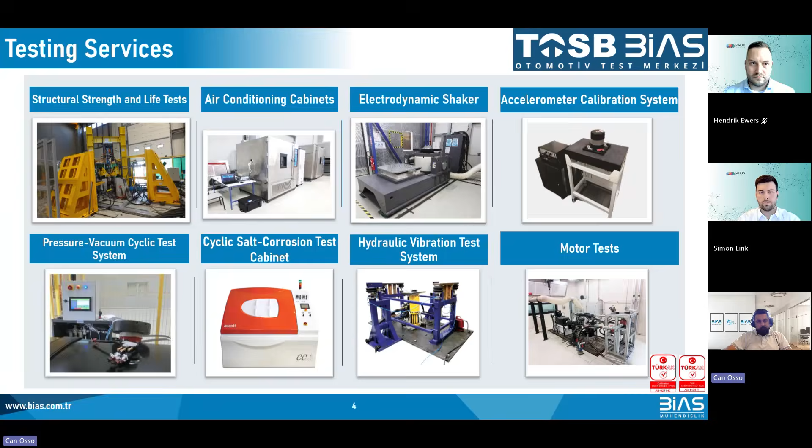We are representing several test, measurement, and CAE companies which are the best in their field, and one of them is IANUS Simulation. As you can see in the presentation, our softwares are the most powerful ones in FEA, CFD, MBD, and acoustic, which are Nastran, Cradle, Adams, Actran, Romax, and IANUS as well.

We also have co-simulation capabilities with different disciplines such as fluid structure interaction and aeroacoustics. We have the capability to manage all software-related processes, including training, technical support, engineering services, pre-sales and post-sales activities.

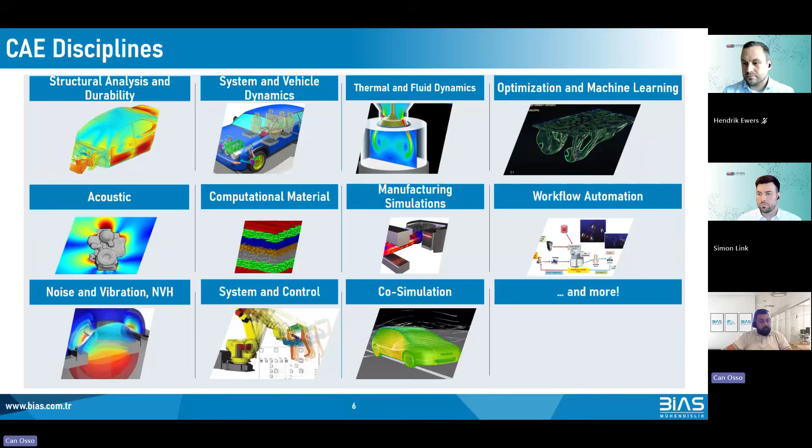We can also provide engineering services, and you can see our expertise in engineering services for different disciplines, from NVH analysis to multi-body dynamics analysis, from analysis of composite structures to aerodynamic analysis of aircrafts. We have a large team of experts in their respective fields.

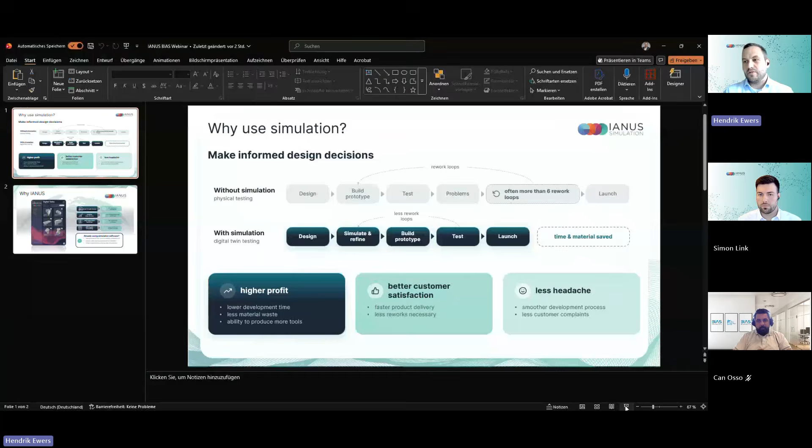So the first question I brought with us today is, why should you simulate? What's the reason, why should you do it? I mean, you are experts in your fields, maybe you work with experience for many years, but why should you now switch and start implementing simulations? The best reason for it is that you are able to make informed design decisions.

In the past, without simulation, you built the design, you built the prototype, you tested it, you experienced some problems in the prototype. Maybe the velocity or the viscosity of the extrusion is not right, for example. Then you have to do rework loops, build a new prototype, test it again, and you face another type of problems. So you have to do all these loops: rework, design, test it, rework, design, test it. And that costs a lot of money and a lot of time before you are able to launch your product.

With simulation, you switch to digital twin testing. So instead of testing your physical tools, you develop your physical prototypes but test on digital twins, which is much faster and much cheaper. Why is that? Because first you create the design, you simulate, make a little adjustment on the design, build the prototype, test again, and you have less rework loops. Because in simulations, you see directly where something is not correct with your tool design, where you should do improvement.

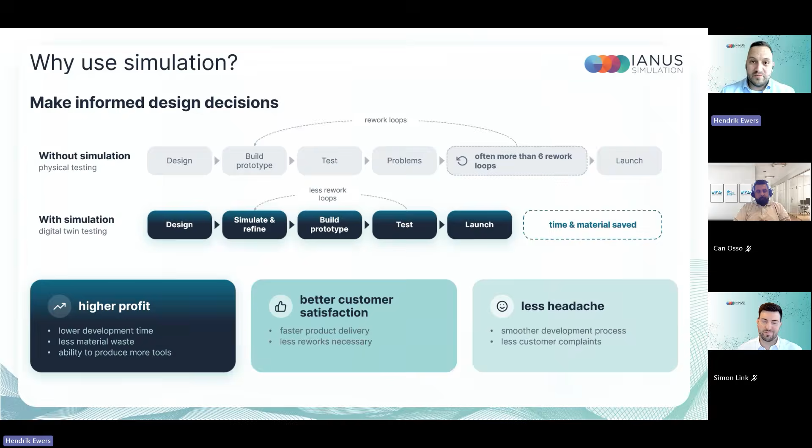And that means you have a higher profit because you have a lower development time, you have less material waste, and you are able to produce more tools, so you are able to sell more. You have better customer satisfaction because the faster product delivery and less rework necessary create a happier customer. And of course, you have less headache because you don't have these customer complaints like maybe you used to, and the development process is much smoother.

If you choose to simulate, which is the modern way of creating new tools, why should you use IANUS simulation software? First of all, we are cloud and web-based. That means you don't need any expensive hardware. You don't need to install anything. You don't need to update anything. We do that for you. We are cloud-based. You simply log in like you used to log in into Instagram, Facebook, or LinkedIn.

Our software, and you will see that in the live demo in a minute, is very intuitive and easy to use. So you don't need to be a simulation expert. It doesn't matter if you have simulated already or not. It's very easy to use. You don't need the knowledge. There's no complicated user interface. You can literally start right from the spot.

Why is it so easy to use? Because we use fully automated workflows. That means everything is automated. You can start a simulation within 5 minutes. You don't need any extensive trainings. And because we calculate in the cloud on high performance clusters in Germany, we receive very fast and reliable results, because those high performance clusters are among the fastest in Europe.

And now maybe some of you are already using simulation software and say, hey, I'm using this, I'm using that. That's totally fine, don't switch from it. You can use us in addition to your current solution. You can take pressure from your simulation department. You can enable your salespeople who are maybe not so familiar with the technical simulation thing to simulate and create better offers. Or you can also do faster experiments when you use parallel simulations. That's the final part of this presentation.

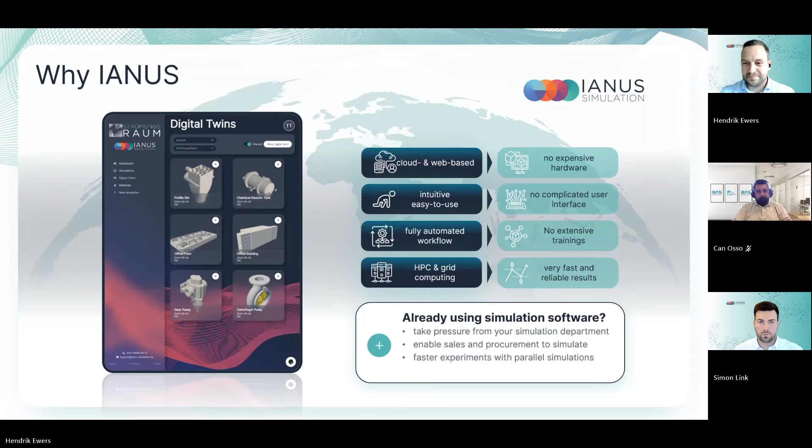And today I will go into the technical details, give you an overview of the simulation for plastic injection molding and plastic profile extrusion.

So again, very shortly, why do we use simulation? Hendrik already gave an overview of the benefits. And yes, we use them to make better decisions. So what does this mean? For example, we can use simulation to create more accurate quotations by providing reliable estimates of cycle times, and thereby also evaluate the manufacturability of the parts before it goes into production. And we can also use it to predict and optimize the manufacturing process.

This is something we see in real applications with our customers, that we can reduce the development time and also the cost of tools. And yes, we can also reduce the amount of material needed for the testing.

So yes, I will share my screen now. Give me a second.

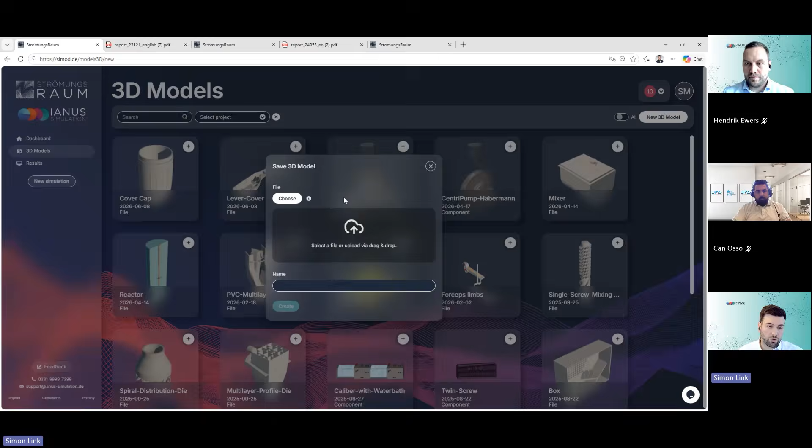So when we've created the flow channel from the extrusion die, we go to a new 3D model, go to the file browser. We can then select the file, and we support different formats like exchange formats like STEP, or native formats like SolidWorks, Inventor, NX, and Parasolid. You simply enter a name, click create, and then the model is being uploaded.

So then we go to this flow channel. We say, okay, we want to start a new simulation here. And what happens next is that we have to decide what we want to do. We want to do the extrusion die simulation. And we have to enter the inflow temperature first, let's say 220 degrees Celsius.

We select the material base, and we have a very huge material database, and I will select this ABS here for now. Inside there's also the processing temperature, in this case, which we can change if we want to run at 80 degrees also. Then we have to define the throughput, like 150 kilograms per hour.

And the model I selected is a co-extrusion with two different materials, so we need to define the second inflow, as you can see here. We select a different material for this example, define the throughput here also, and then we confirm this with next.

And what you can see here is a summary, an overview of all the configuration we've made. So we see the inflow temperature, the material information, and so on. And when everything is correct, we can start the simulation here on the top right.

And what's basically happening next is that the simulation is then submitted to one of the HPC clusters, the high performance computing clusters, where we have computational capacities. And then everything is done completely automatically.

So we start with the pre-processing, meaning the geometry preparation, the meshing itself, the simulation, so the solving of the simulation, and also the post-processing, where we also generate the simulation report completely automatically.

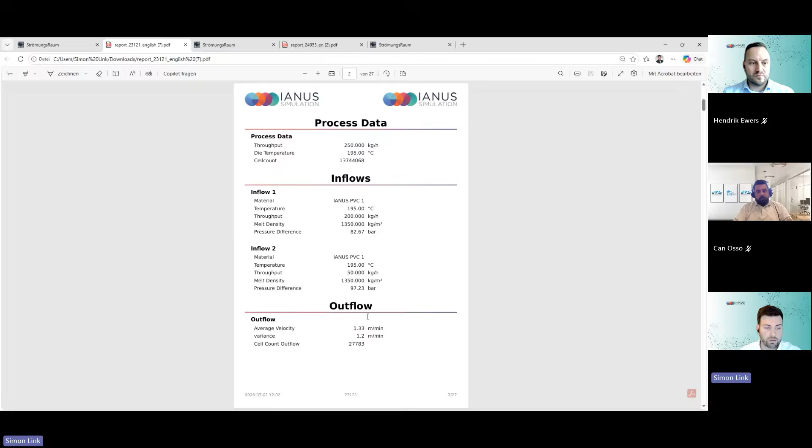And also what's simulated: what is the average velocity looking like, which is very important at the exit of the die, and also the variance. So we basically want to aim for a more or less uniform velocity distribution at the exit of the die. The variance should be as small as possible.

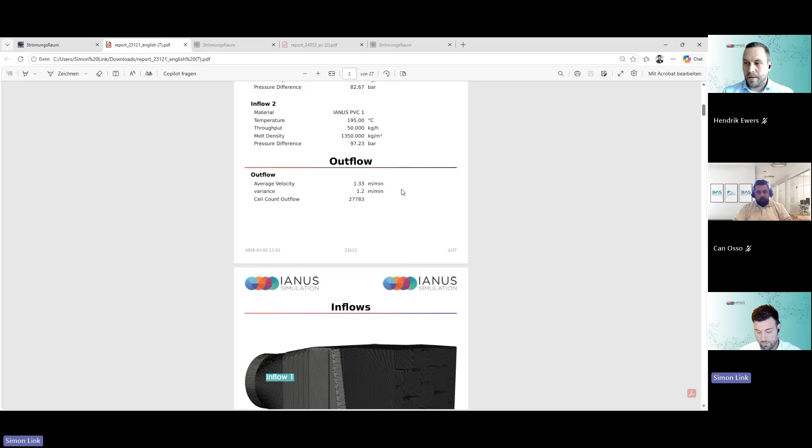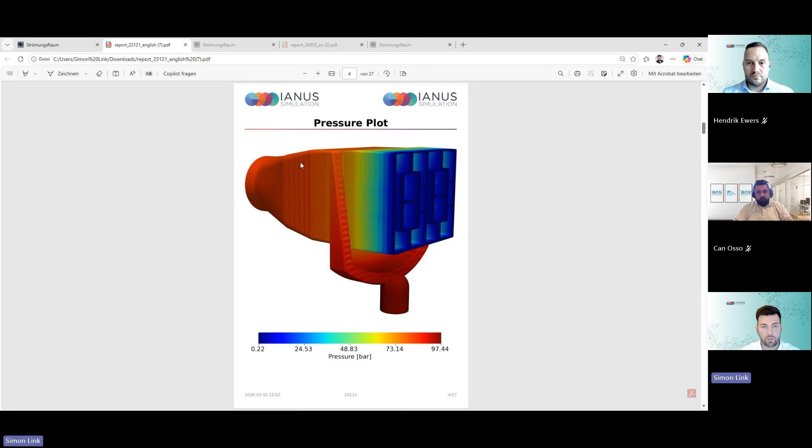We'll give you a very quick overview of the different measurements we have. So here's the pressure plot, where we can see the different pressures inside the die, of the melt itself, and we can detect areas which have higher or smaller pressure. So we can see what's going on in the extrusion die. We get more insights, and we can then make improvements to our die.

The most important plot is the one for the velocities, as you can see at the exit of the die. The scale shows the velocity: blue is almost 0 meters per minute, red is around 7 meters per minute. We see very low velocities in the middle of the profile, much higher velocities on the outside, and also very small velocities at the top. So we see these velocity hotspots, as I call them, and this can be a problem in the manufacturing process if we don't have a more or less uniform velocity.

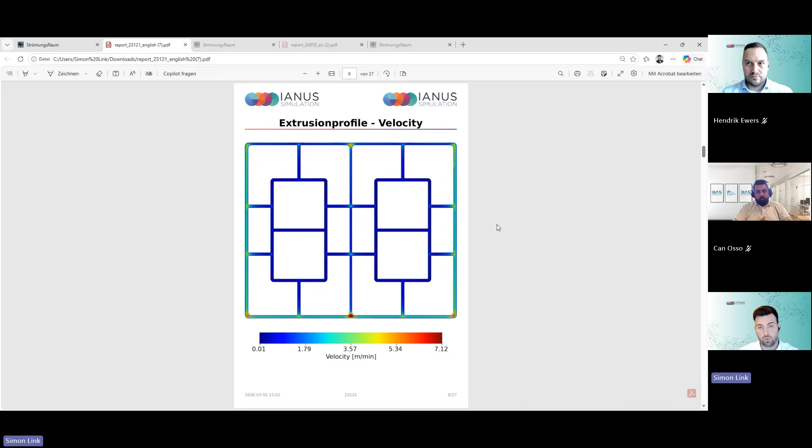So we can go back into our tool design and make adaptations. We can detect areas, and maybe in the middle we can decrease the resistance of the flow, and on the outside we can also make adaptations to reach a more uniform material velocity.

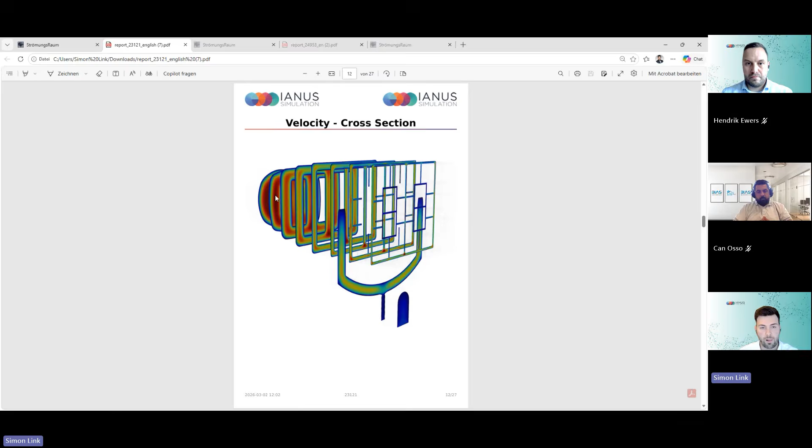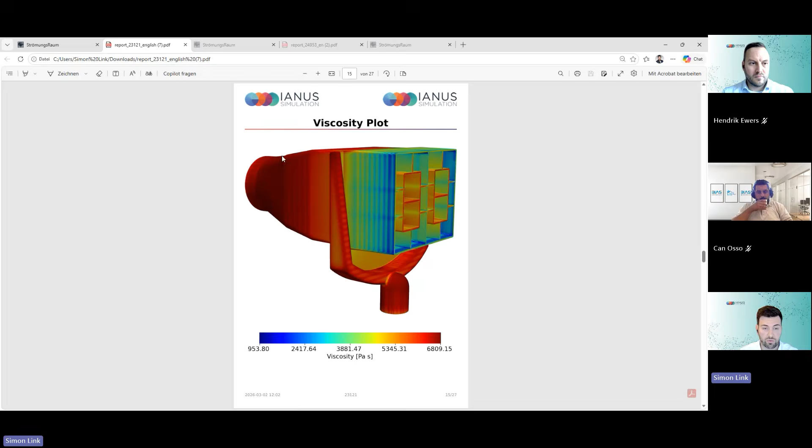We also have many other measurements, I'll go through them quickly. As you can see, we have these plots with different cross sections and slices, where you can go into detail and see what's happening inside each one. We also have this for viscosities, so you can detect dead zones in areas with very high viscosity, and the same view for shear rate.

What's also very important is the streamline plot, so we can see which paths the melt will take, beginning from the two different inflows, and then calculate the residence time. This lets us detect areas that may lead to very high residence times for the melt as it moves through, and we can aim for changes and improvements in the tool design.

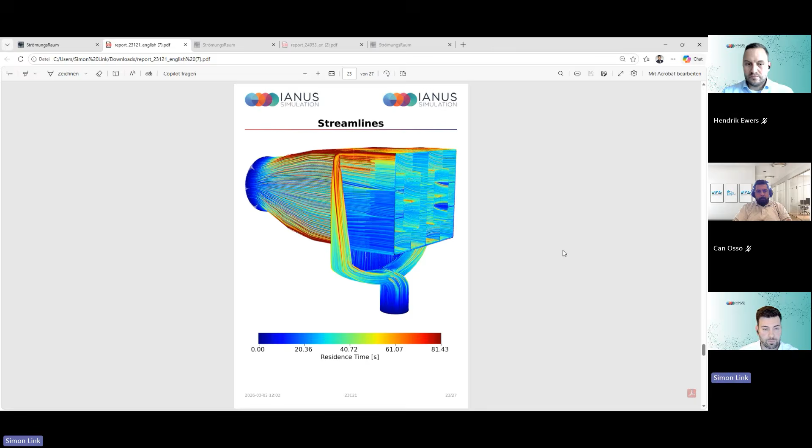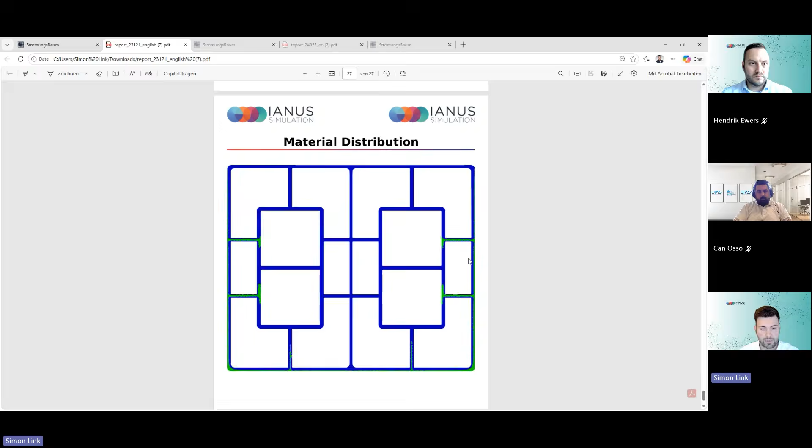What's also very interesting is the material distribution, as you can see here. This is a co-extrusion profile with two different materials. On the inside we have the blue old material, and on the outside there's the new virgin material in green. We can detect the layer thickness and see whether we have a continuous layer or not.

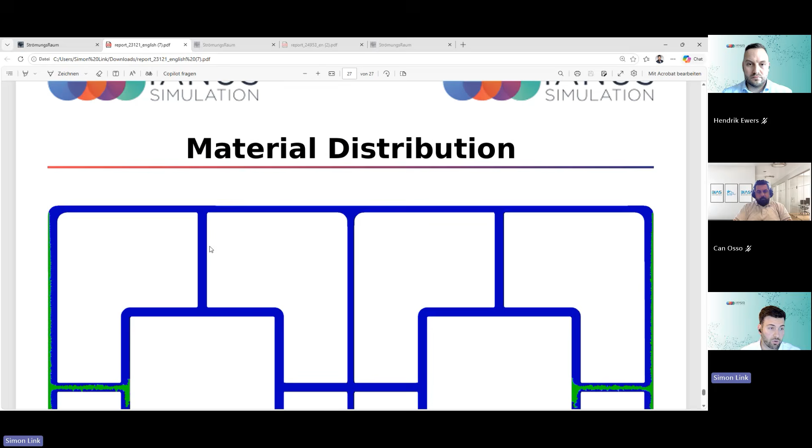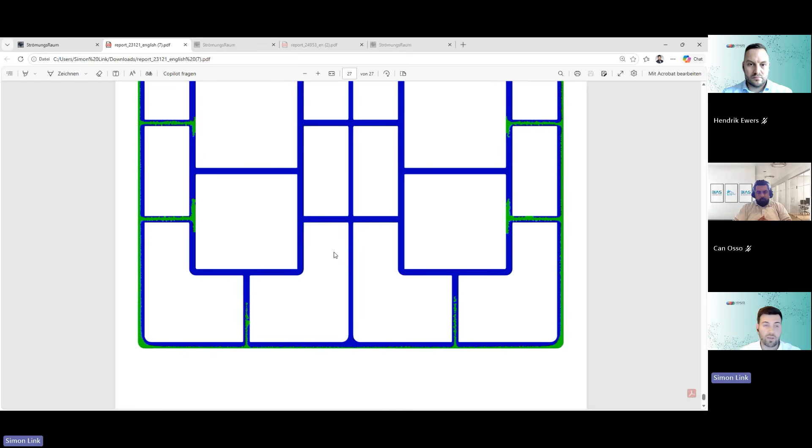As you can see here on the top, the profile is not covered by the green material at all, and we can also see the green material moving into the profile. This makes it easier for us to make improvements to the tool even before manufacturing.

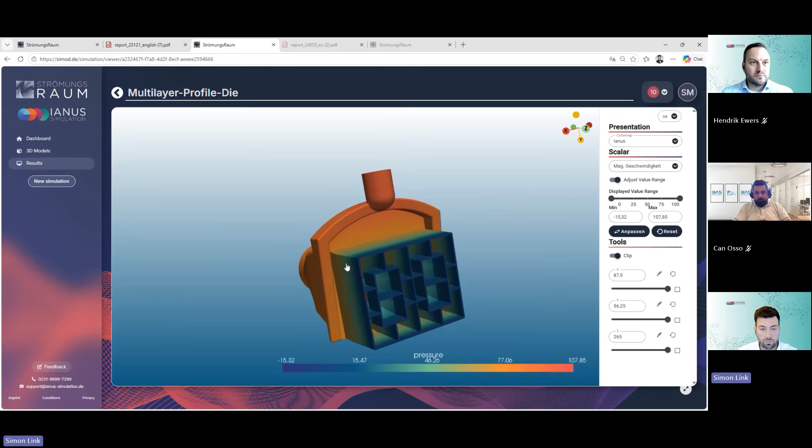If we want even more insights, we also have this live viewer, where we can have a more detailed look. If I switch to the velocities - this can take a second to load - now it's loaded, and we can adapt the scalar range of the velocity scale, and also make section cuts.

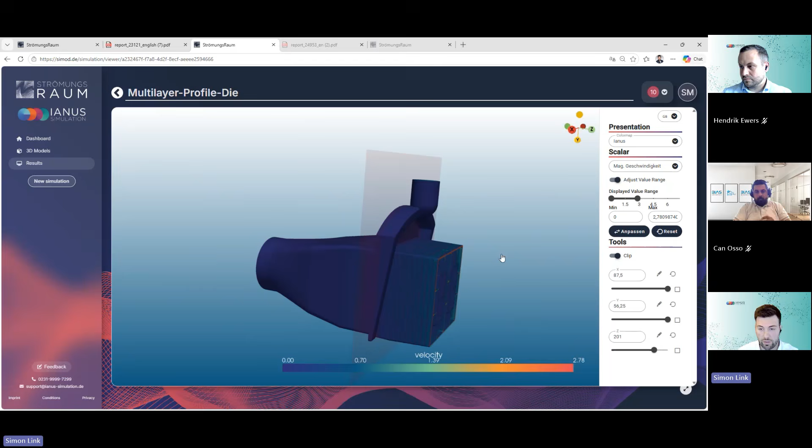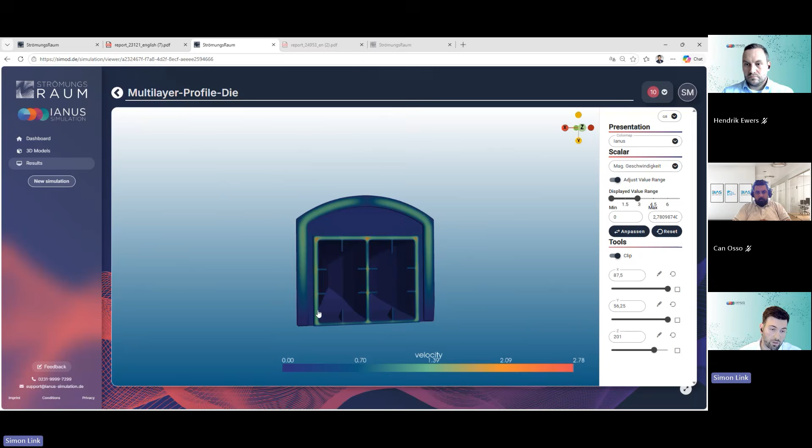I can have a look at the front, but when I want more insight into what's happening inside my tool, I can use the section cut. I'll cut it and see what's happening - this takes a second. Now we see what's happening in the area where the melt from the two inflows meets, and there are quite some areas where the melt velocity is lower. This will probably lead to less material in the second layer on the outside, and we use this information to adapt the tool design.

Okay, so that's it for the profile extrusion, but I would also like to give you more insight into injection molding and what we're capable of doing there.

It's basically the same when we want to upload the model. We go to new 3D model and upload the part for injection molding, as you can see here. Then we click on new simulation, and we have to select more parameters - in this case we also say we want to do injection molding.

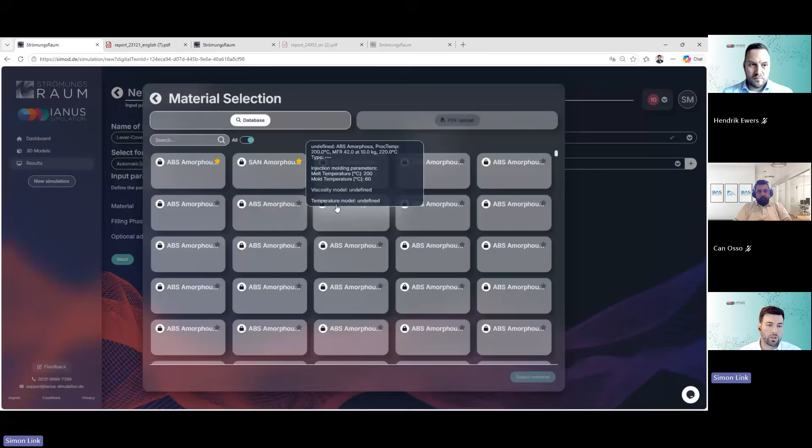We have to select the material for the injection molding - I'll go with this one. As you can see, different values for the mold temperature and melt temperature are pre-selected. We do this to give the user a first idea of what temperatures are reasonable for the mold temperature and melt temperature, but you're also free to change this.

So we can change the temperature here and also for the melt temperature. Then we have to define how the filling phase should take place. We can do this with a flow rate manually, but we can also define it by an injection time in seconds. Or we can also say, okay, I don't have an idea for the injection time, please calculate it automatically within the software.

And this is what will be done by the algorithms in the software. This can be used, for example, if we're in a very early development stage and don't have enough information about the process, and we want to get a very good injection time, which can be calculated automatically.

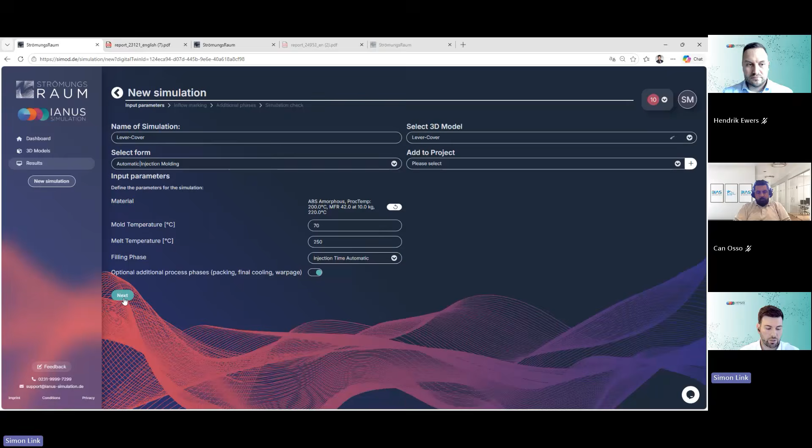So I activated the button here to calculate the packing, the final cooling, and also the warpage. And I'll go here to next.

Now we have to define where our injection surface and injection points are. In this case, we have only one injection surface, which I just selected, but we can also create multiple injection points or surfaces. I can define a diameter and just create it.

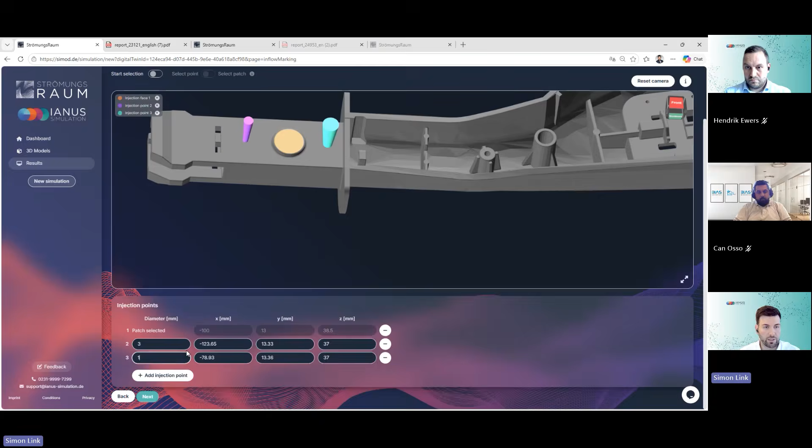Here you can see the different injection points we have, and we can manipulate them. I can change the diameter, for example, here to 1, and I can also manipulate the coordinates. Then I can also remove them if I say, okay, I don't want them inside, and just delete them by this. So I accept this, we go to next.

Now we have to define how the packing phase should take place. We can do this with manual parameters, entering a packing pressure in bar or a packing time in seconds, or we can also do this automatically. Same for the cooling phase. Here we can enter either a time in seconds, or let the software calculate this automatically. And we want to have a look at the warpage.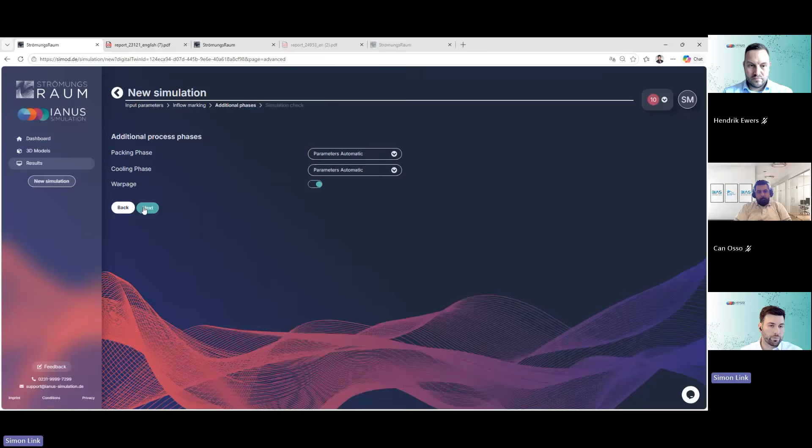Here we're getting an overview of all the settings we've done in the simulation, and we can see if everything is correct. If that's the case, we can start the simulation, and then everything is completely automated again. The simulation is submitted on the HPC cluster, and the geometry preparation, the meshing, the simulation, and also the post-processing are done completely automatically. Then we get a notification by email when the simulation is finished.

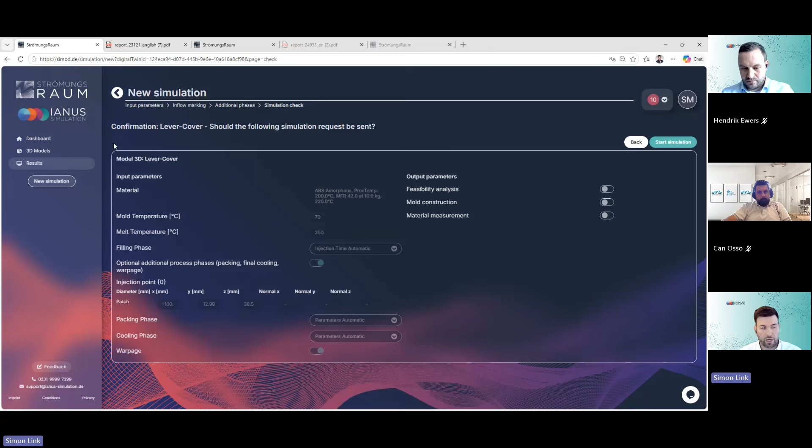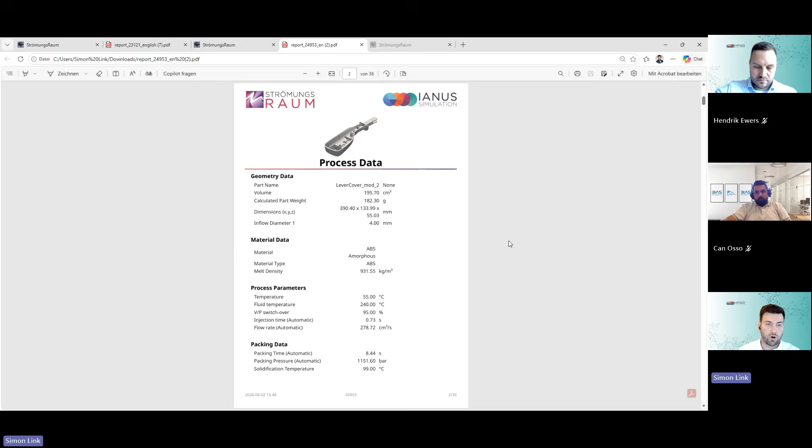So let me give you an idea of what the report looks like. This report is also completely customizable up to your needs, and we get here an overview of the process data at first - what are the process parameters that we've used for starting the simulation.

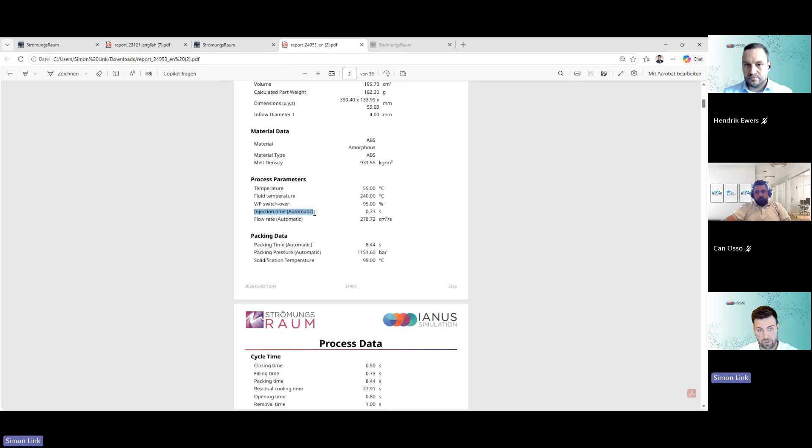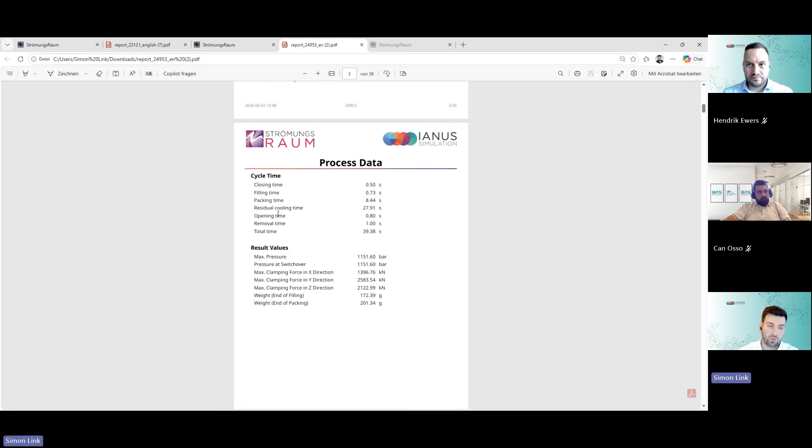We also get information about the injection time, which was calculated within the software, also the flow rates. We get information about the packing time, the packing pressure that is needed, and information about the cycle time - what are the cycle times of each stage, the total time, what pressure is needed overall, and what clamping forces are needed from the machine.

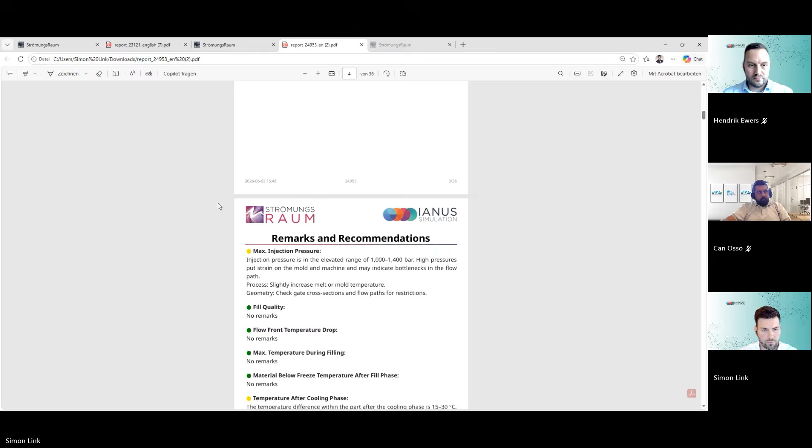We also have these remarks and recommendations included, and this is something very new that gets very good feedback from our customers. What this basically is, we look at all the different measurements and plots, and we have this kind of color scheme.

So it's green, yellow, and red. Green means everything is fine - the filling quality in this case is good. There are no remarks. You can have a look at it, but you don't need to.

Then we have the yellow color, where we look at the injection pressure, for example, and in this case it says we have an injection pressure between 1000 and 1400 bar, and this is a very high pressure that could lead to an issue. You should probably have a closer look at it. This makes it very easy for the user to look at the different measurements and say, okay, this looks fine, I will have a closer look to the injection pressure.

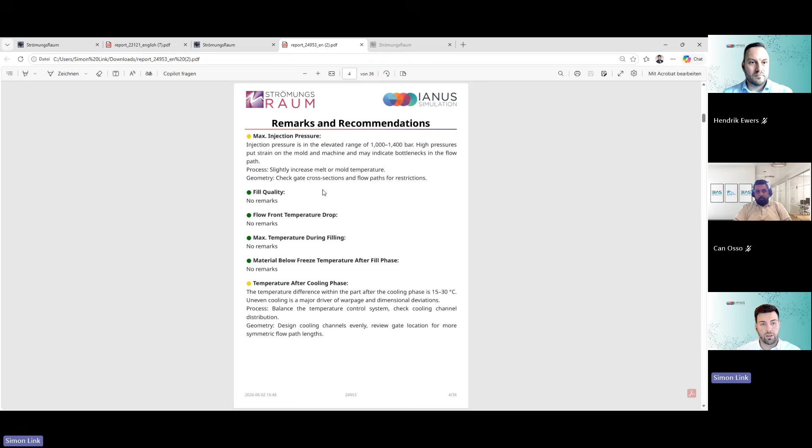We also have recommendations for the process, so how we can adapt it. For example, we could increase the melt temperature or the mold temperature to reduce the flow resistance and then reduce the needed injection pressure. We can also make changes to the geometry, for example changing the cross-section of the gate, also reducing the flow resistance.

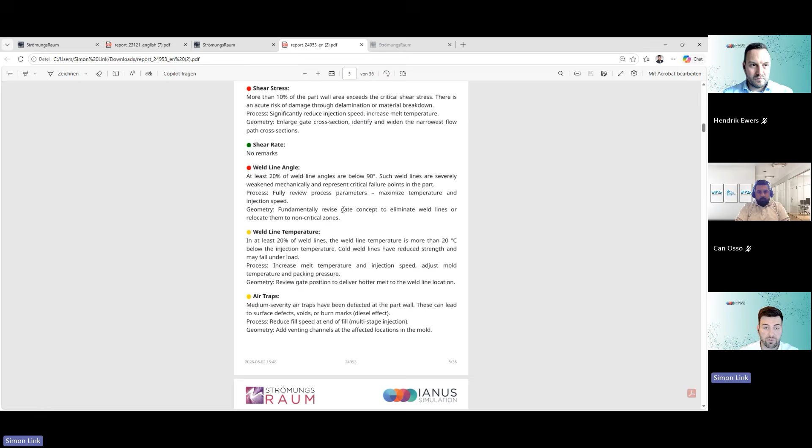We also have process recommendations here. For example, to make changes to the temperature, maximize it, or change the injection speed. For the geometry, we can also think about the concept behind the arrangement of the gates to eliminate these weld lines, or position them in an area that is not as critical.

Overall, we are getting a very good idea of what's happening in my simulation and in which areas could be an issue, and where I should have a closer look.

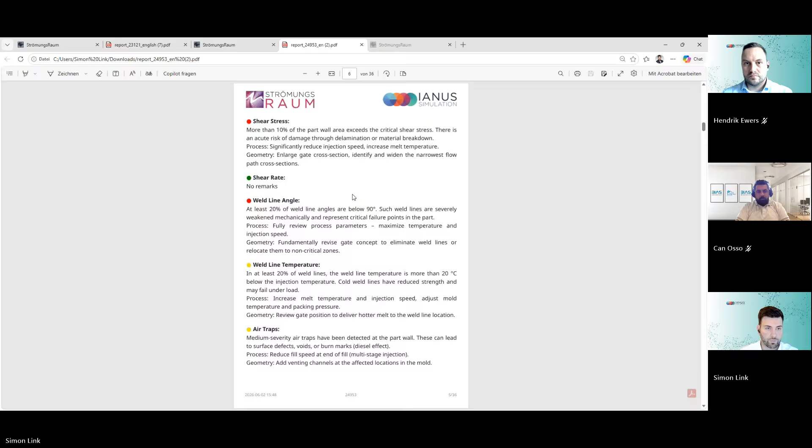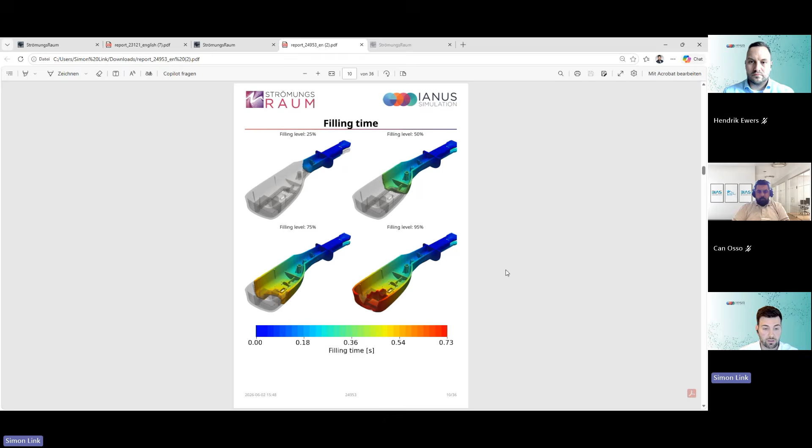Let me give you an overview of the different measurement plots we've included. Here is all the important information: the filling time for different filling levels, as you can see. So we get an idea of whether we have uniform filling or a short shot, and how long the filling takes, from different views.

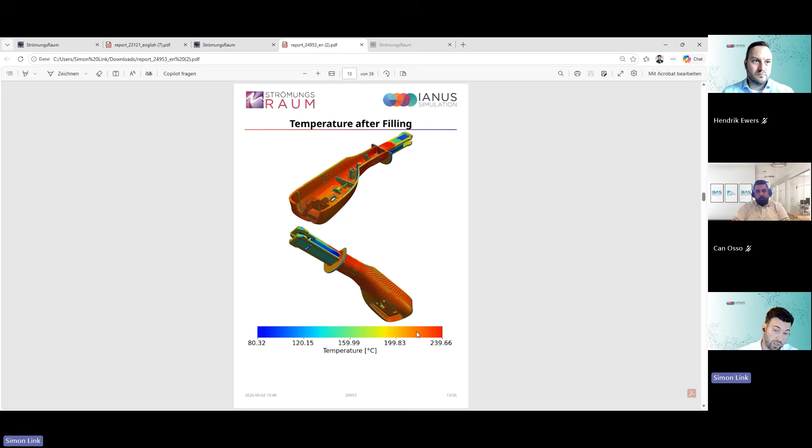We also get information about the temperature distribution after the filling. Do I have temperatures that are too high, which could lead to material damage, and so on.

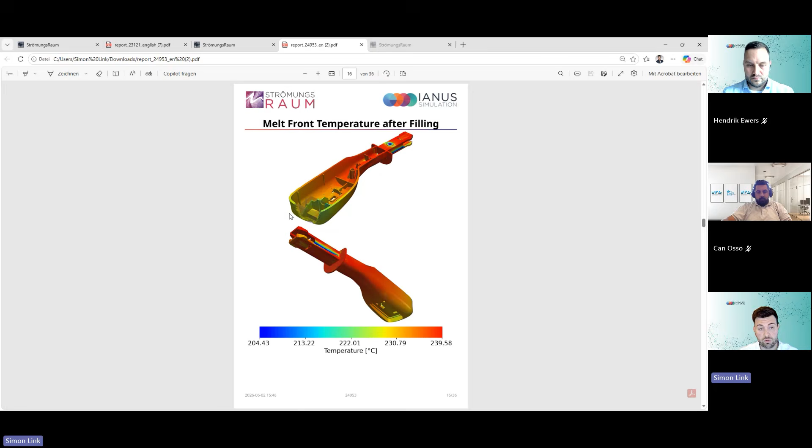We also have information about the melt front temperatures during the filling process - what temperature the melt front has at which positions in the cavity. We can also detect areas where the melt front temperature is too low, which could lead to further problems.

We have all these different plots, like the clamping forces for different directions, depending on the parting line and where I put it in the mold.

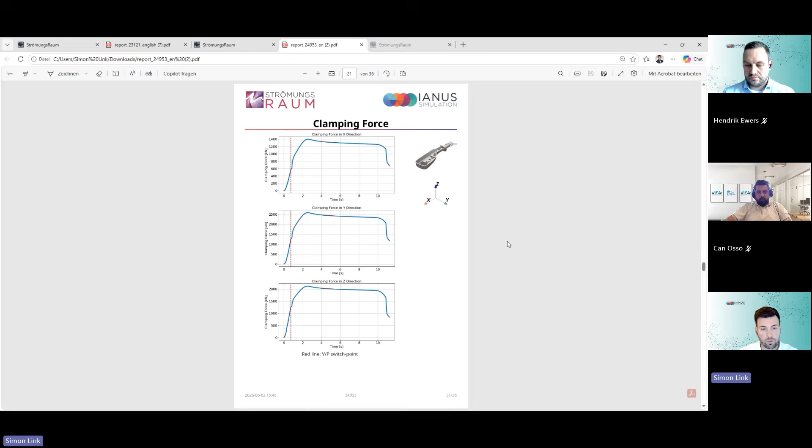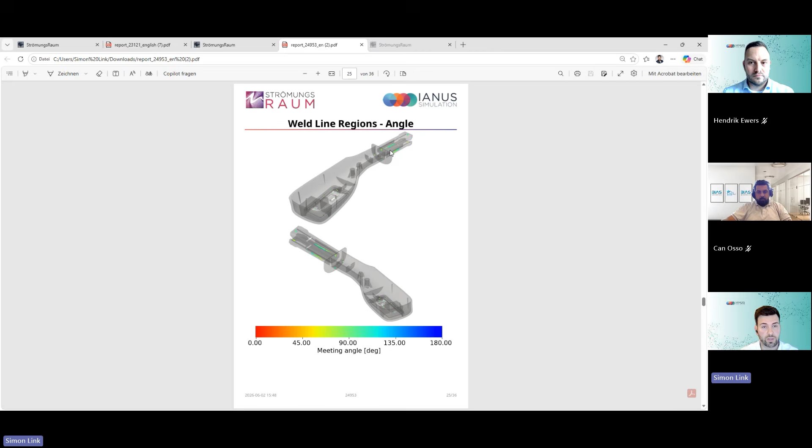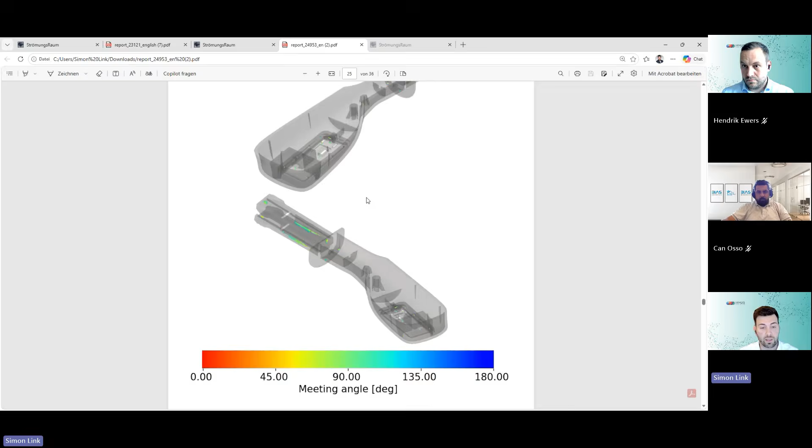Here you can see the plot for the weld line - this could be a potential issue, as mentioned in the recommendations. Let me zoom in a little. We have the weld lines that are visible, and we also see the angle at which these weld lines are formed when the melt fronts connect. When the angle is too low, as already mentioned, this could lead to a weakened strength of the weld lines.

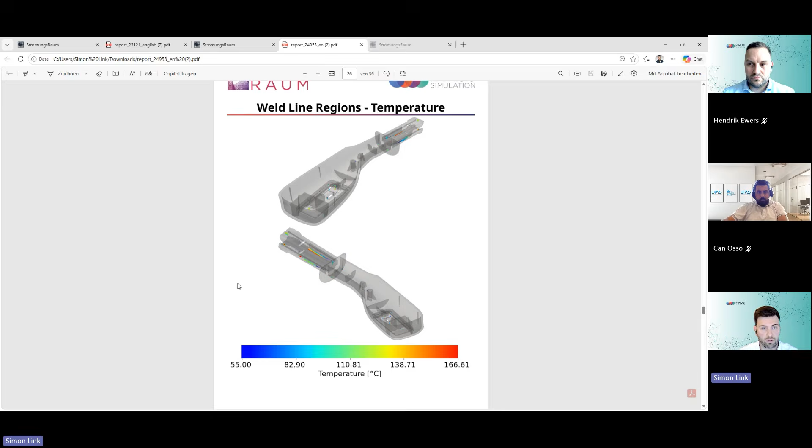We also have the fill quality included, as you can see here - everything looks fine - and the warpage included here. So we get information about the final results for my part.

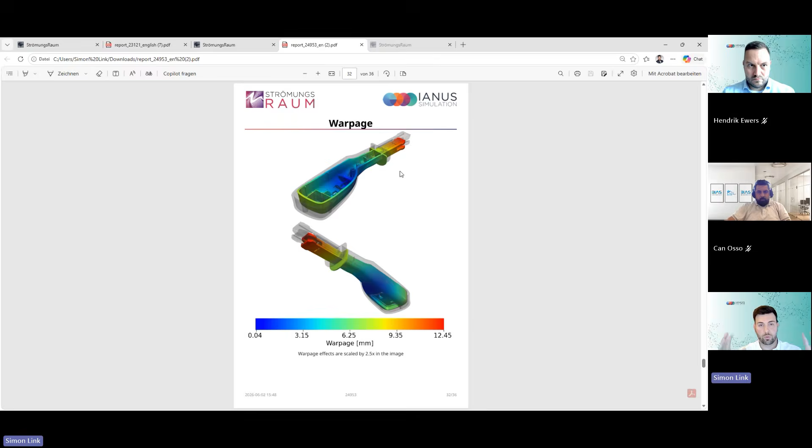If we want more information about what's happening, we can look at the live viewer. Let me start it - you can see the filling here. I can also speed this up, as you can see.

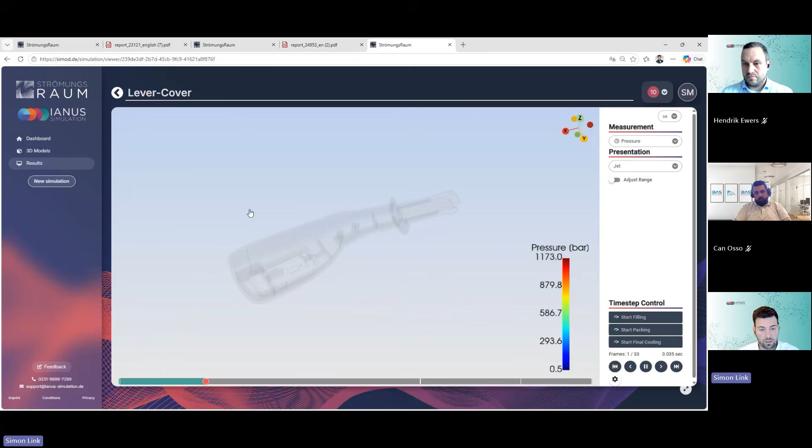So we have more or less uniform filling, and complete filling. We can see the pressure distribution here, but we can also look at different measurements, like the temperature, as you can see.

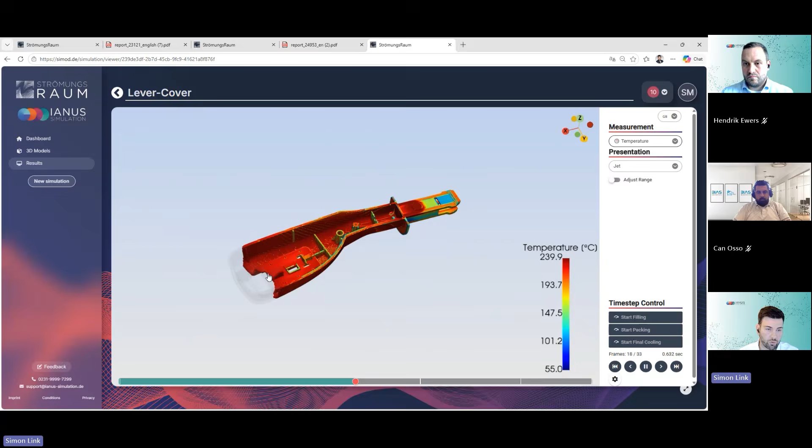We can see the temperature distribution during the filling, and also during the packing phase, and during the cooling. We have all these different measurements, like the warpage, where we can look at the part. In the end, we can use all this information to make better decisions.

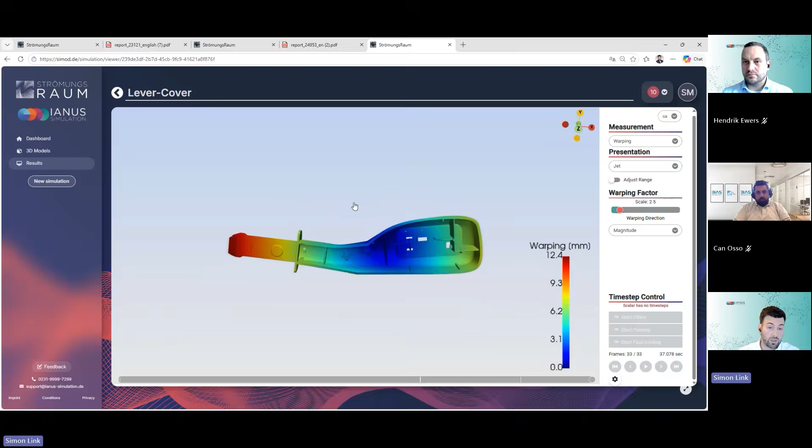So we can see if we have a good part that can go into production, or if we have to make modifications. That's it from the product presentation, and for now I will hand over to Hendrik again.